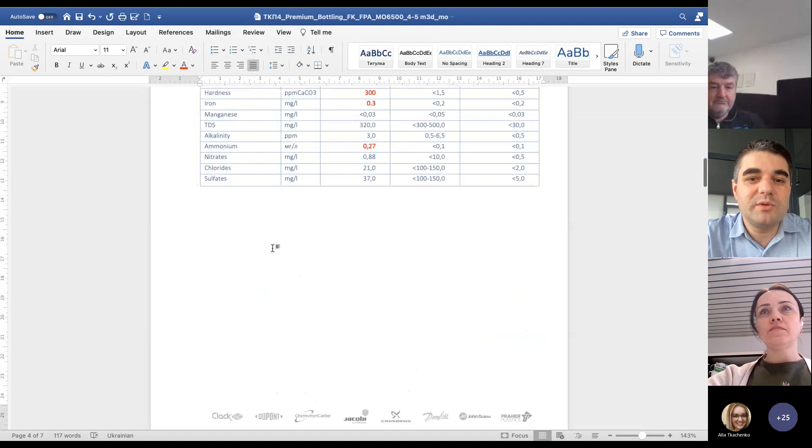But I think, Oksana, can you see my screen or no? Yes. Yes, Rosti, I can. Yeah. So today I will start with our regular job, what we do every day.

So normally when we select, we always start with the water test and the water demand. So now on the screen there is a very good, very well formed and very well arranged request on the selection of the commercial RO. This will be an RO system and the complete technology for drinking water bottling with a demand of 5 to 6 cubes a day. The water comes from the municipal water supply.

So basically, this is the water that comes from Kyiv, the capital of Ukraine, centralized water supply station, and this should be a system that will be used not 24 hours a day. The system should work on the storage tank. And so this is the general information, and here is the water test.

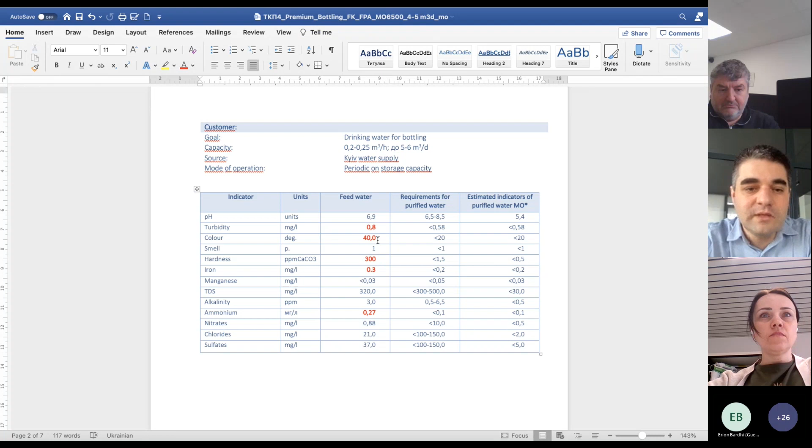So here in the water test we have turbidity, we have quite a high color of water, and the reason for the color is organic matter. The water in our capital city comes from the river, and then it is treated. And during this time of the year, in March, April, normally we have quite a high color, around 40 degrees.

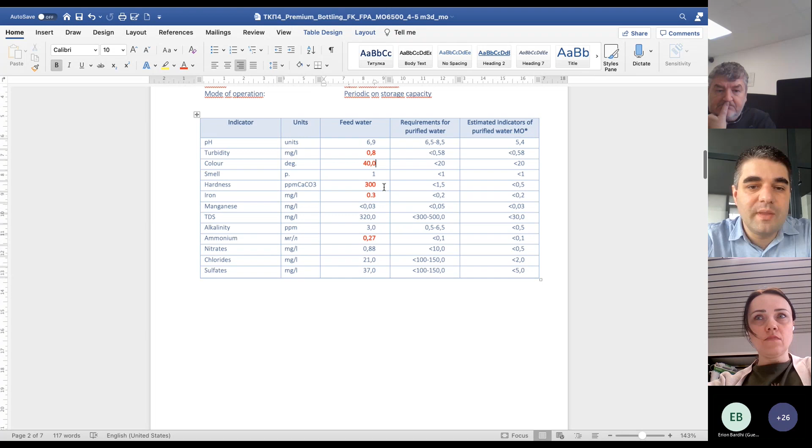Then the hardness is around 300. We have a little bit of iron, manganese during March, a little bit, and this is the total TDS.

Also parameters. Rosti, just a second, please. Erion, do you have a question? Erion, you raised the arm. Do you have a question? Maybe something is wrong. I don't think so. Okay, then try please. Okay. It's okay. This is good. So let's continue.

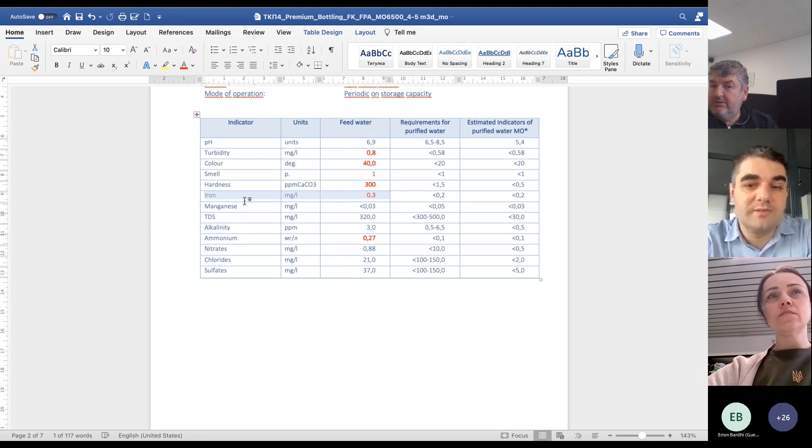We use the Ecomix unit first of all to soften water and to reduce organics. Also, it would be very nice to install an activated carbon filter. Here we use the Filtrasorb 300 activated carbon. It is a macroporous carbon, also to remove organics.

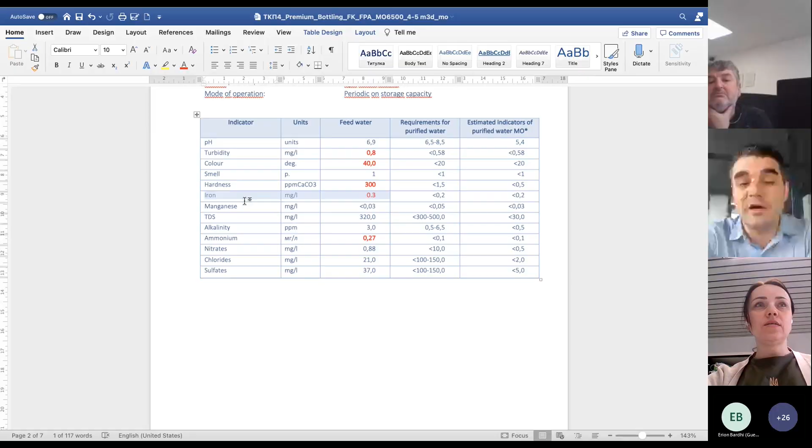Rostislav, sorry again, do you show us something else? Because we see the table with the water analysis. Yes, you should see the flow chart. No, unfortunately, we see the table with the water analysis. Okay, I will switch off for a while and then reconnect. Just a moment. Let me share the screen again. Can you see the flow chart now? Yes.

Okay, so I will start from the very beginning. This is the typical flow chart and set of equipment we use when we prepare drinking water. We call this type of project drinking water kiosks. The core of this scheme is the MO 6500 that provides 0.2 cubes an hour of permeate. As soon as we have iron, organics and hardness in the water, we install the Ecomix unit before RO, and also the unit with activated carbon.

In this case, we use the Filtrasorb 300 macroporous activated carbon. This carbon is particularly good to remove high amounts of organics, because the organics make the water a little bit yellowish. So this is the pretreatment. And of course, before the Ecomix units and the activated carbon unit, we put screen filters, normally a stainless steel screen filter with a filtration rate of 100 micron. So this is the pre-filtration.

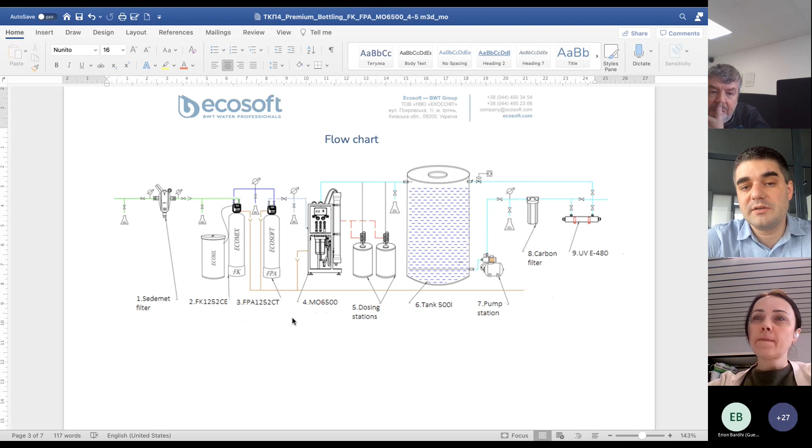Then the water is delivered to the tank, and then we have the pump station. After the pump station, very often we use a cartridge carbon filter and UV. Then we have the line where the water flows to the dispensing area. So this is the flow chart we very often use, and I will come back to this scheme a little later. These are the typical water kiosks we have in Ukraine.

Very often you would see the reverse osmosis unit and the prefiltration. Sometimes we do the prefiltration with tank-based filters and cartridges. In some cases, you may see ones like I have just shown on the flow chart, so we have 2 units before.

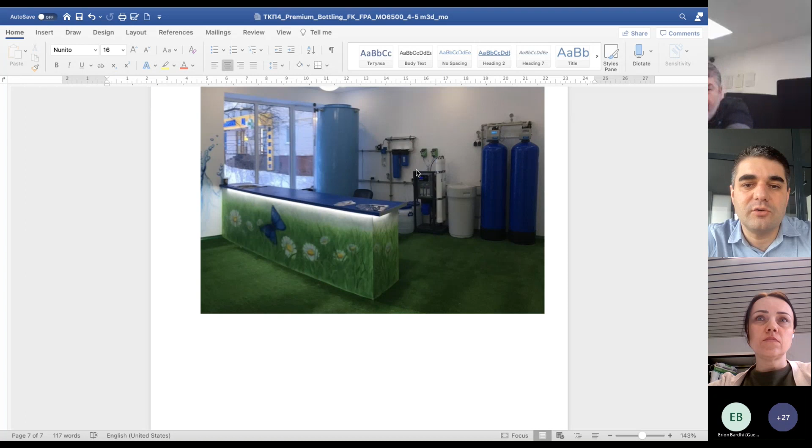Yeah, so mainly, as you see on these photos, we use the 2-stage prefiltration, RO, and the tank. Also, the first one, this is the unit for the restaurant. It has a larger prefiltration because it has the twin unit just before to ensure operation 24/7. Also, I would like to draw your attention to the type of tanks we use.

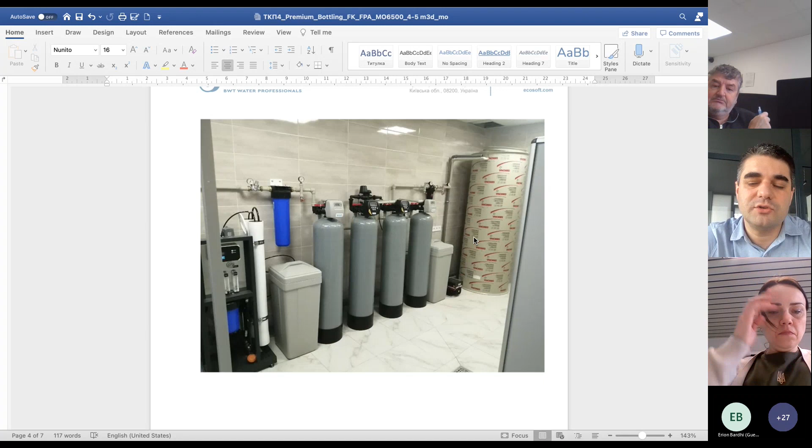Very often we use the polypropylene tanks that do not transfer the sunlight. So if we use this type of tank, the water keeps its freshness for quite a long time, because the cheaper version is to use polyethylene tanks that can let the sunlight through, and then very often after 3 or 4 months you may have fungi growth in the tanks. This is what we don't recommend, but these ones on the photo are a very good solution for drinking water applications.

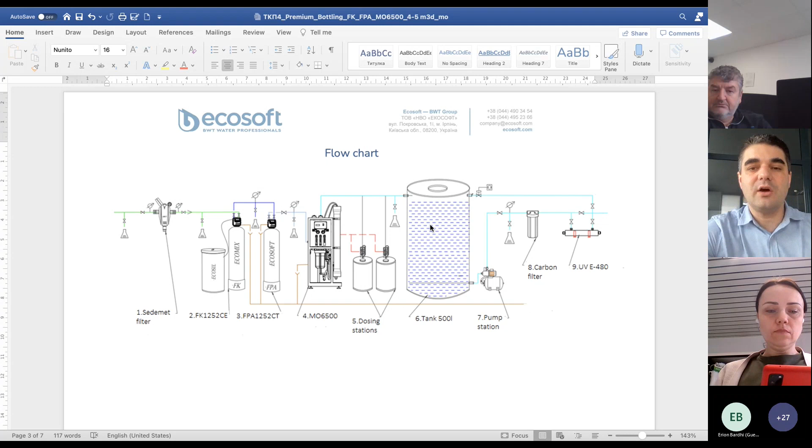So basically, this is the logic behind the selection of the units. Maybe you have questions right now from our guests, and if not, then we could answer questions from Oksana. Okay, I guess no questions at the moment, so I will start.

So, Rosti, thank you so much for the detailed explanation of this complex example. But let's start from the basics. Very often we receive the question: for example, if a customer needs a capacity of 500 liters per hour, will an MO 12,000 fit this request? What should we pay attention to in order to avoid problems?

Yeah, so if we need a flow rate of 500 liters per hour, in the majority of cases you can take a unit that gives you 500 liters per hour and it will do the job. However, there are many buts in this approach. First of all, we should look at the raw water quality and the water temperature in your area. You may give this request from Greece, for example, where the water is warmer, or from the north of Norway or Sweden, where the temperature is normally 10 to 15 degrees all year round.

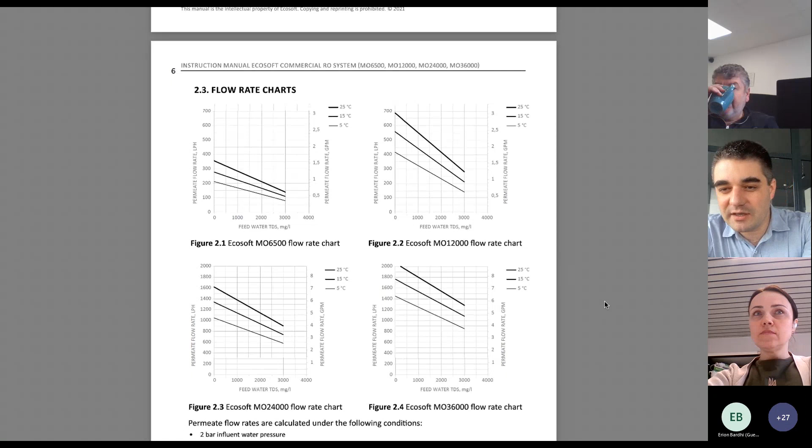And in the manual for EcoSoft units, which you may download from our website. Now, Oksana, now you see my screen. Yes, so on page 6 of our manual you will find a chart that explains the flow rate. This is the 500 liters per hour unit. It explains what the flow rate would be at different temperatures and different feedwater TDS. So let's say we have a TDS. Oh, we hear Maria.

So let's say we have a feed water TDS of 1000 ppm and the temperature is 15 degrees Celsius. Then we see that the flow rate of the system would be 450 liters per hour. So if we ask again whether we can use this unit to get 500 liters per hour, the answer would be no, because you would get only 450. Another aspect we have to take into account is that with time, the flow rate goes down.

When we select a unit, we take into consideration that over 3 to 6 months, our flow rate may go down by 30%. So in our case, we may go to 300 liters per hour, and then for sure this particular unit would not do the job for 500 liters per hour. I know it is sometimes quite disturbing when a customer asks if we can use this unit and, instead of saying yes or no, we keep asking questions. What is the water test? What is the temperature? But our main goal is that you do the job right the first time. So our goal is to select equipment in the right way.

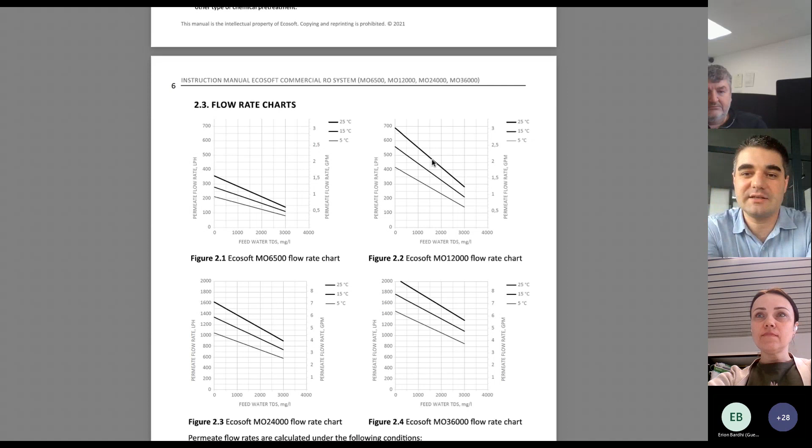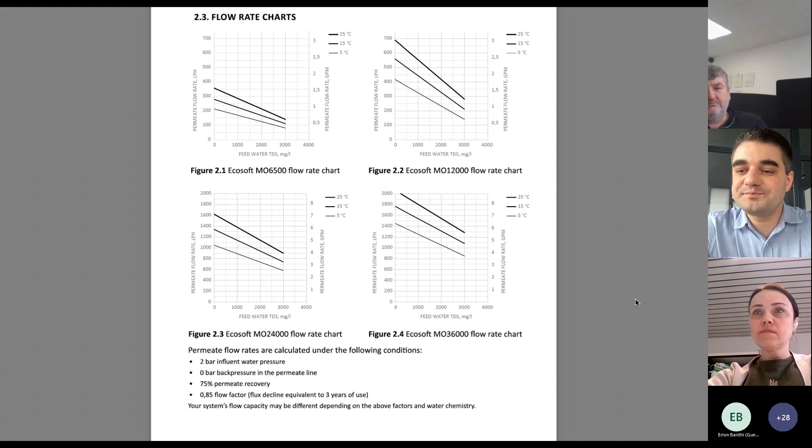What we also have to take into account is the daily consumption. If we need 24/7, then for sure we have to select the next unit. We should go to an MO 24,000, and this would be the solution in this case. If we need these 500 liters per hour only 10 hours per day, then I would suggest installing a larger tank to do this job. So this is the answer to your question.

Mm-hmm. Okay, thank you. Any questions or clarifications on this, gentlemen and ladies? There is a question from Dominic in the chat. Dominic is asking, what is the purpose of the carbon filter after the storage tank with an RO filter? The purpose of the carbon filter is to remove smells that might appear in the tank with time.

And this is the reason why we use the cartridge filter. So it works like the post filter. Yeah, exactly. It is a post filter just in case you would have some biogrowth or biofilms in the tank, and then to avoid this unpleasant smell in the treated water, we have to use the post filter.

Okay, thanks, Rosti. So while we started talking about the systems after, let's talk about the systems before the RO system, about the pretreatment. Rosti, what basic pretreatment should we use before the RO? So first of all, when we talk about commercial ROs, in many cases we would use pretreatment. I would say in 9 cases out of 10, there would be pretreatment before RO. So it would be either sediment filtration, activated carbon filtration, or softening. Maybe in some rare cases, like 1 of 10, we would have just the RO filter, in cases where the water is quite good, but this is quite rare. So normally we will have pretreatment.

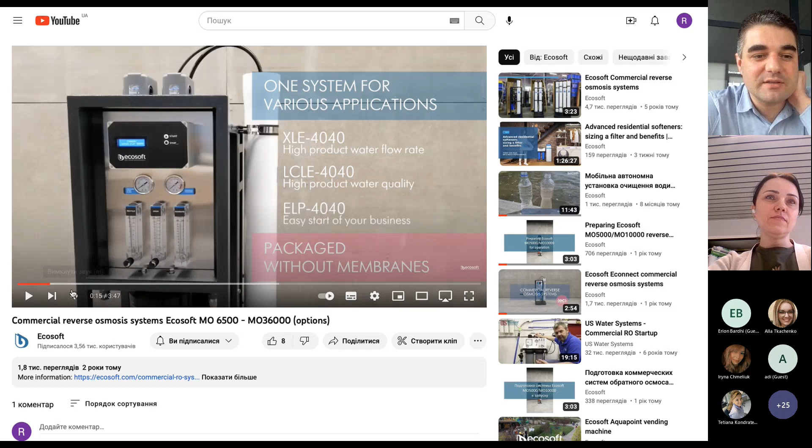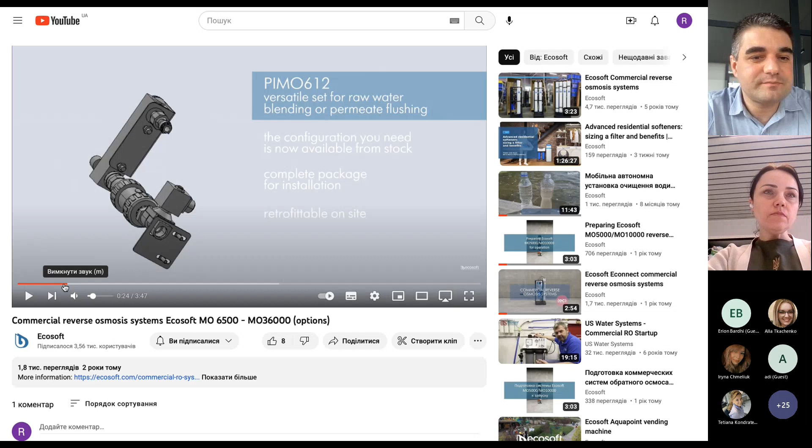So this is the blending kit that is called PIMO 612. 612 means that it's good for units of 600, 6500 and 12000. Let's say it this way, with 1 membrane and 2 membrane units. So this is the universal kit for 2 units. When you order it, you receive a box with the solenoid valve, the check valve, and the flow meter.

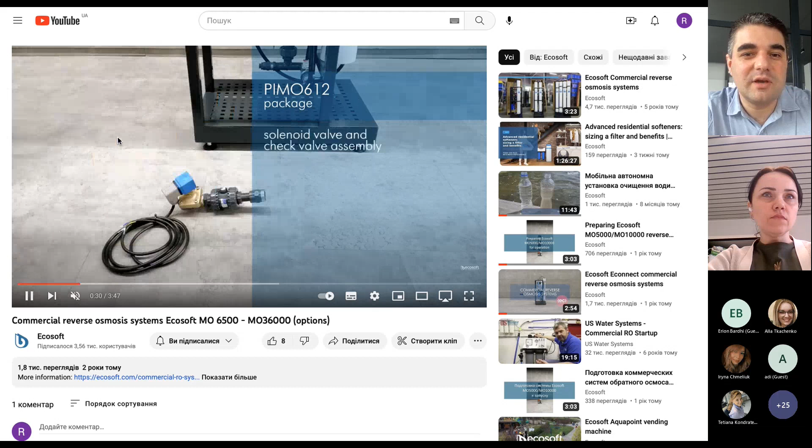So then I will let it play so that you see what it is. Now you see the screen, yes, right? Yes, we do.

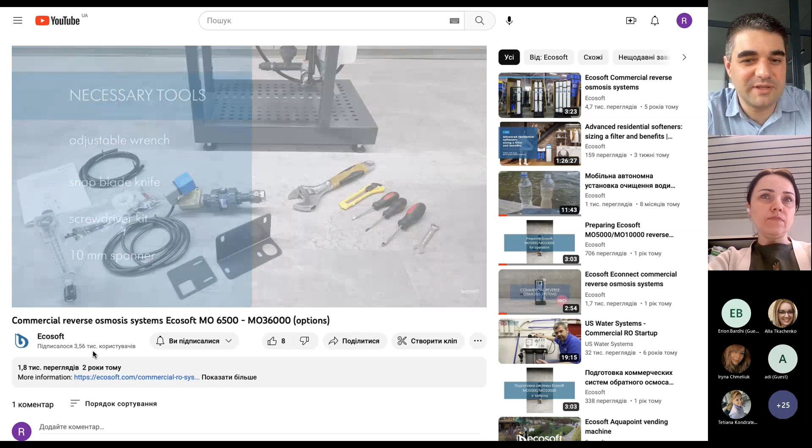So you got the complete set of all required parts and also brackets. Then, of course, you will need some tools, but standard ones. So this is case number 2 and number 3. So when you need to use this kit as a permeate flush, you either use the pump station, the one you have, or you may use a separate one. It depends on what kind of station you have, and then you connect the permeate. You connect it to this blending and flushing kit.

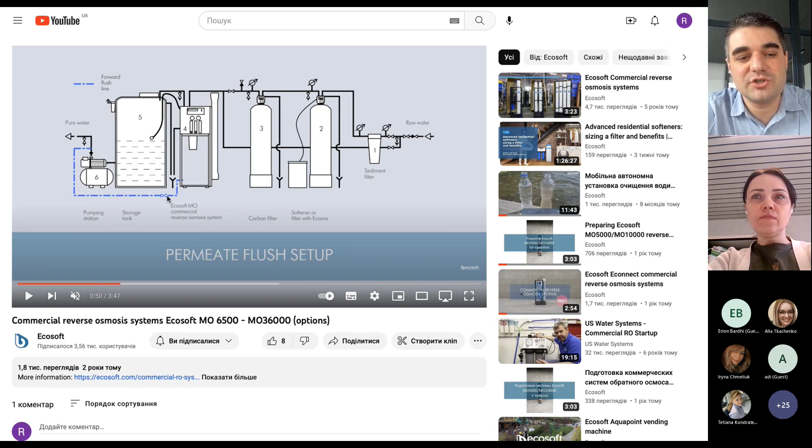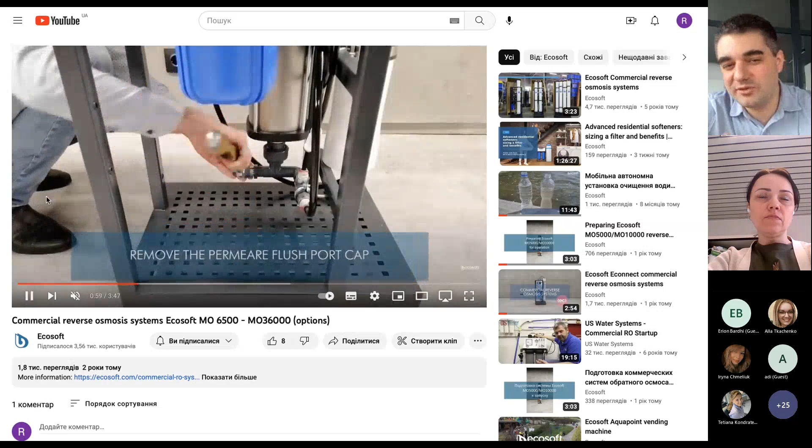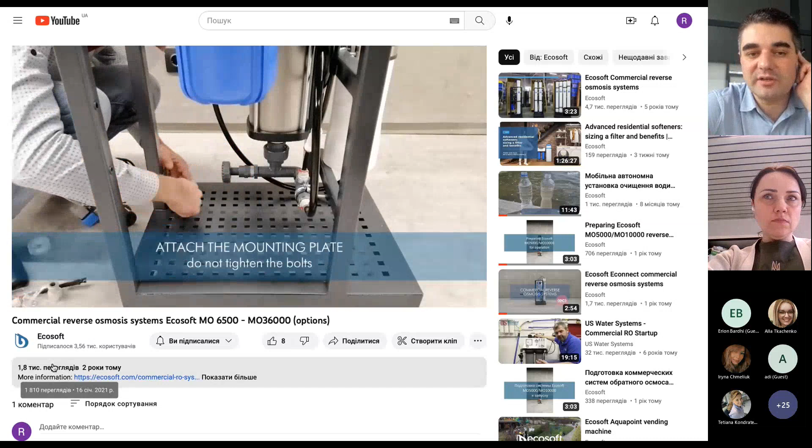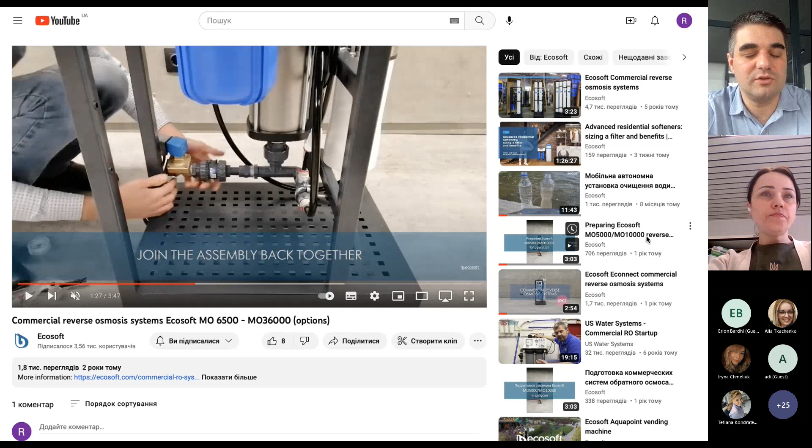Good news: you may read the manual, but you could also see the video. So in this case, you could select whatever you want. As you see, it's quite easy to do this installation. It is quite easy to convert a standard unit to a tailor-made unit just on site, so every technician can do that. I think I will stop it here because everyone can see this video online and use it whenever you need it.

Also, there is one more question, Oksana. What is the correct maintenance for the RO membrane that you suggest? For example, acid, biocide after. What is the performance of the membrane after? So when you stop the unit for the CIP, when you have this drop of flow rate, then you apply a sequence of chemicals, a sequence of cleaning to clean the membrane. There is a rule of thumb for the most common sequence: it consists of cleaning with alkaline solution and then with acid solution. This is the majority of the cases.

If you have, for example, silica in the water, then you always start with the alkaline cleaning. If you have organics in the water and you have bacteriological contamination, then in between alkaline and acid, you use the biocide cleaning. You can also download the manual for our CIP station, and you can look at what the performance looks like, what the equipment is, and what chemicals we suggest to apply.

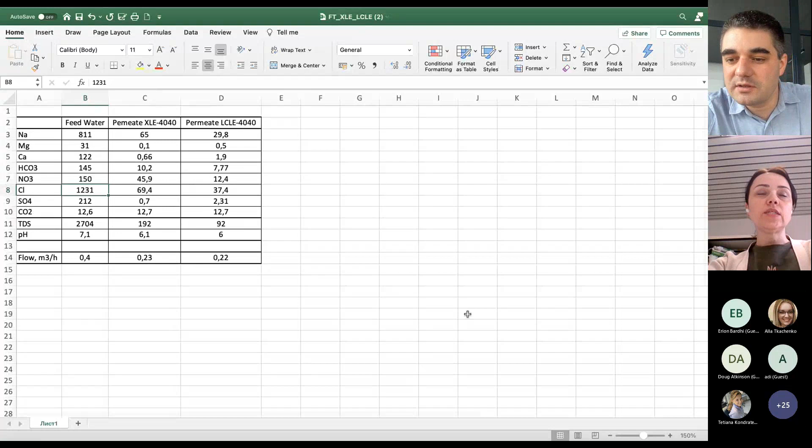So we made a calculation of the permeate quality. If you have this kind of water before the membrane, we calculated in the Wave software what the water quality would be after the XLE 4040 membrane and the LCLE. So the straight answer to your question: in this particular case, the pH would be 6 in both cases.

I would also draw your attention to the various parameters of the water after. For example, the TDS. The XLE would provide you a little less than 200 ppm when the feed water is 2700, and you would have 92 after LCLE. So this is the difference.

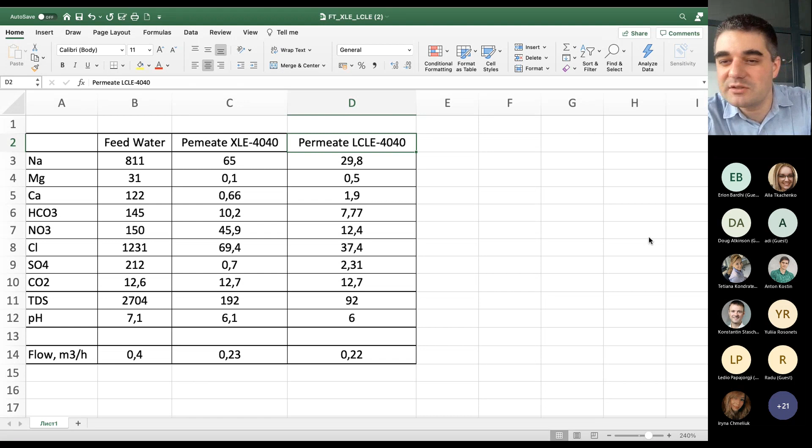Also, thank you for the question that you have written to us before. It was the question on the chlorides concentration: what should the membrane be if the chlorides are 530 ppm before, and the project needs to have chlorides below 18? The answer is that you would have below 18 ppm of chlorides if you use the LCLE membrane. We have already made that calculation, and this membrane will fit your application. I believe the person who asked is online now.

Rusty, we have one more question from Dominic. And by the way, this is in combination with my questions regarding the tanks after the RO system: what tanks we can use for the RO system, and then how we can make the remineralized water after RO based on this. So first, after RO, there should always be a tank. A pure water tank for the permeate, and this is our strong recommendation, because the reverse osmosis unit should deliver permeate to the tank, and then when we have various equipment, it could be dispensing equipment or a hot water boiler, etc., it should be delivered by the pump from the tank. So this is a general rule.

A very good question always appears: what should be the volume of such a tank? Our approach is that the minimum volume of the tank should equal the production of the unit. So let's say the production of the unit is 500 liters. Then the minimum volume of such a tank should be 500 liters or more. We do not recommend making it less than 500 liters.